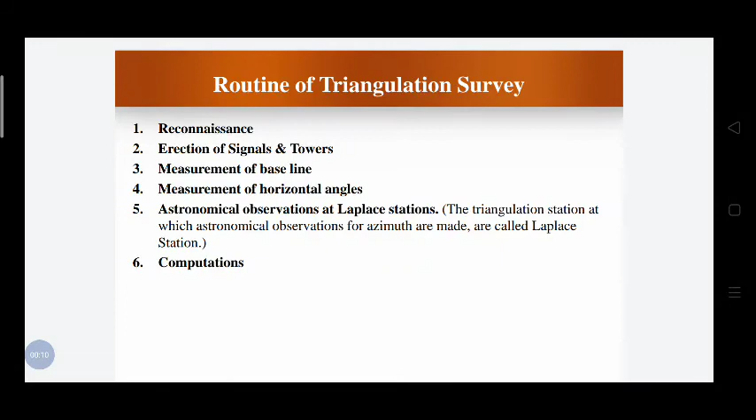Okay, the next topic is the routine of triangulation survey. These are the points: reconnaissance survey, erection of signals and towers, measurement of baseline, measurement of horizontal angle, astronomical observations and calculations. Okay, coming to the first one, reconnaissance survey.

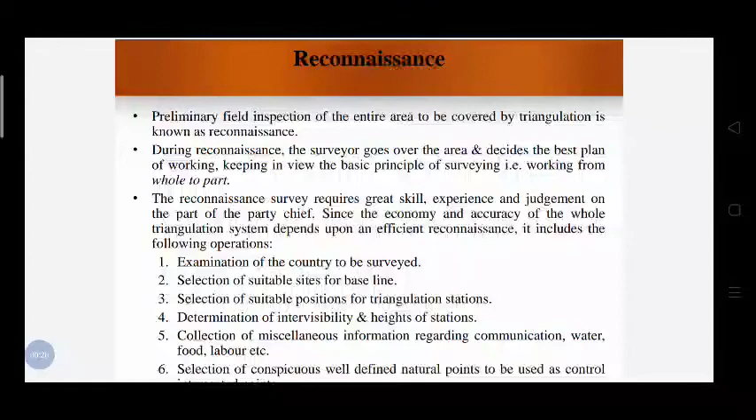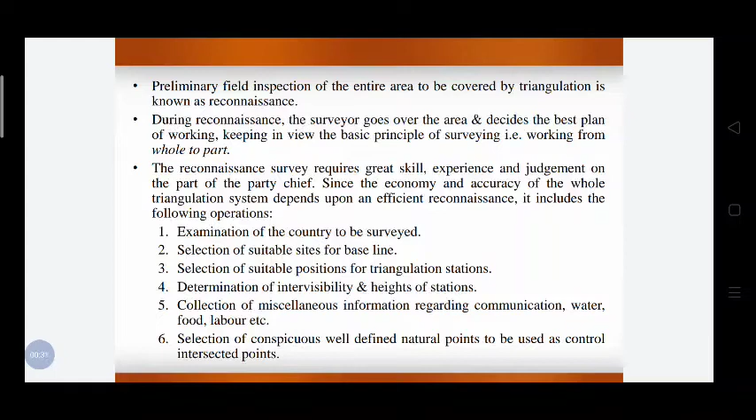What is a reconnaissance survey? It is a very rough survey carried out before carrying out the actual detailed survey. In the reconnaissance survey, the surveyor actually goes on the field and decides the best working plan, that is the approximate locations of the triangulation stations. Then he will work out on those approximate stations, and he will decide the actual or the correct

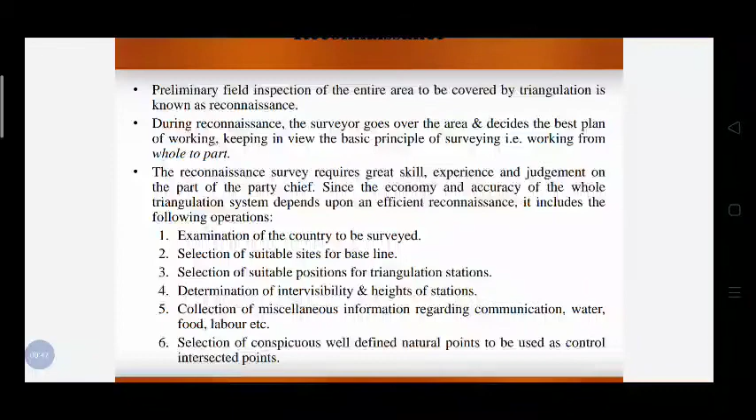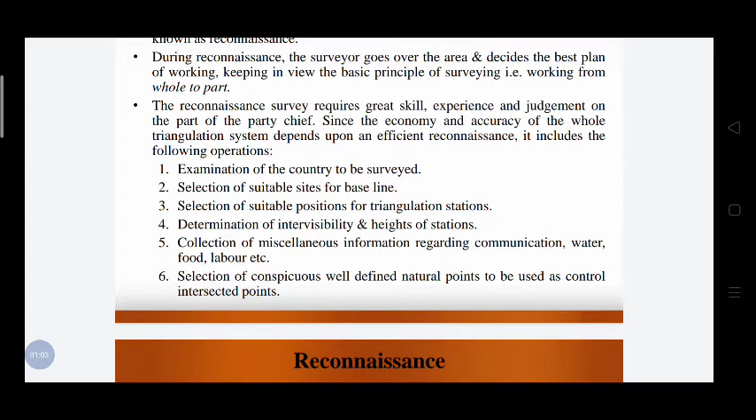triangulation station. For the reconnaissance survey, the surveyor should possess great skill, experience and judgment, as the economy and accuracy of the triangulation stations depend on his judgment, skills or his expertise

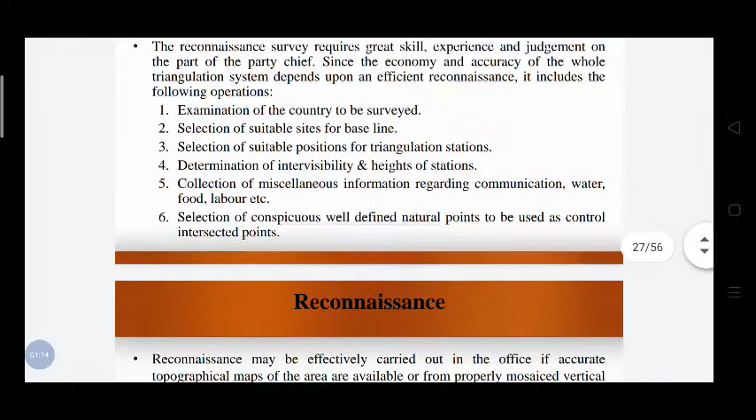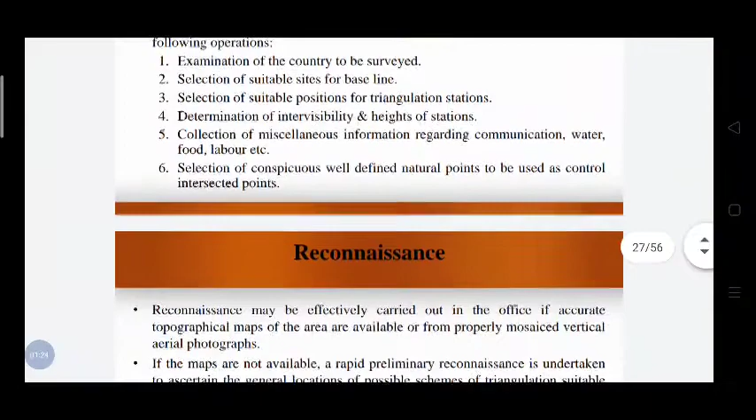in the field. So the reconnaissance survey includes the following operations: examination of country, that is actually going on the field to be surveyed, selection of suitable sites for the baseline, selection of suitable position of the triangulation station, determination of intervisibility and height of stations, collection of miscellaneous information regarding communication, water, food, labor.

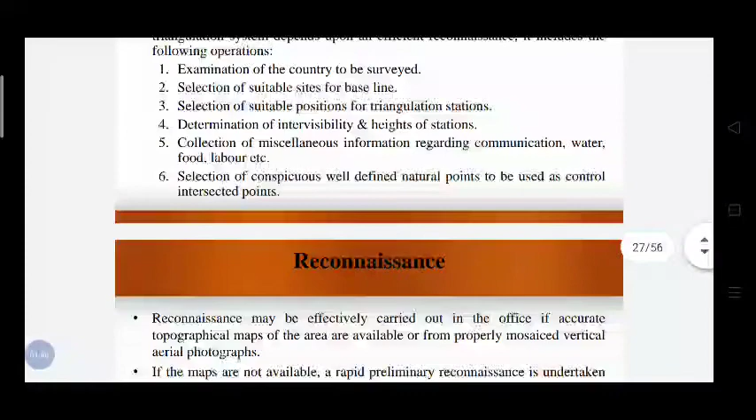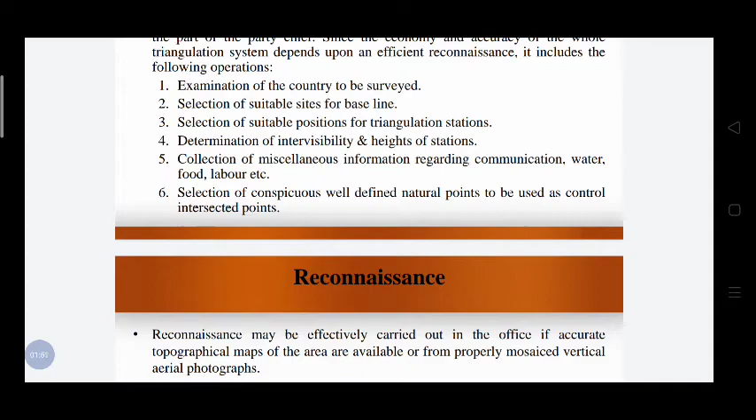As we have seen, the area of the primary, secondary or tertiary triangles goes up to hundreds of square kilometers. So when we travel in such a vast area, we should also make sure that there is proper communication between our base camp and the surveyors who are going on the field, and also the supply of food and labor.

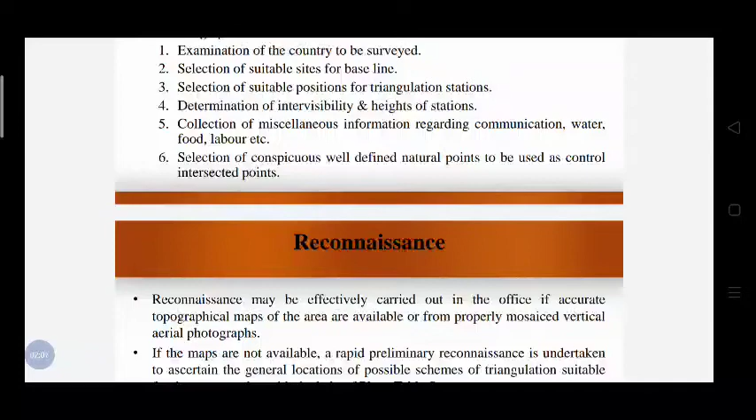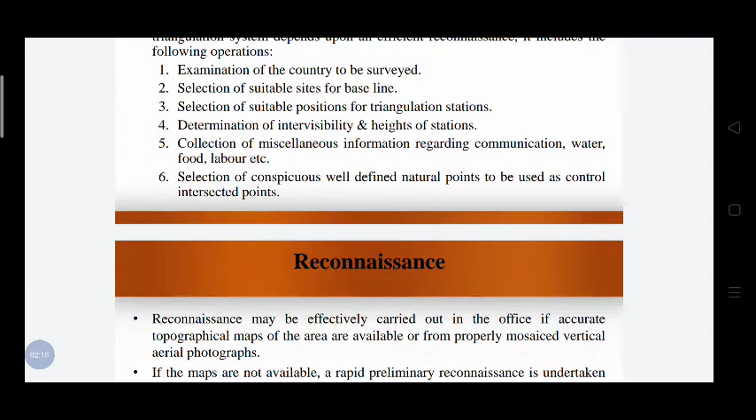Selection of proper well-defined natural points to be used as control points. So we should make proper use of natural elevation so that we can make sure of the intervisibility between the stations. If one of the points is located on high ground, it will be visible from the other stations.

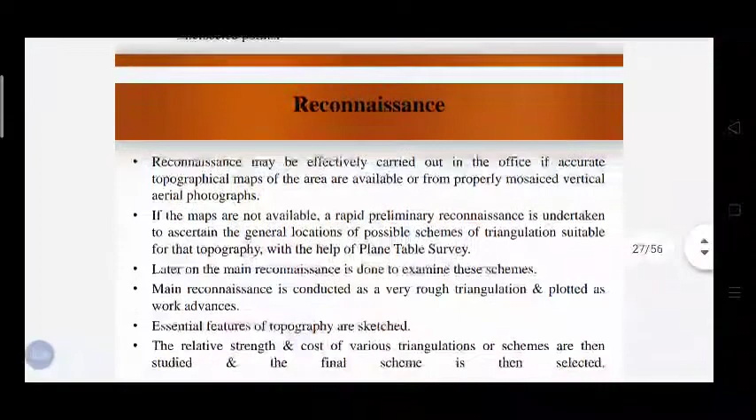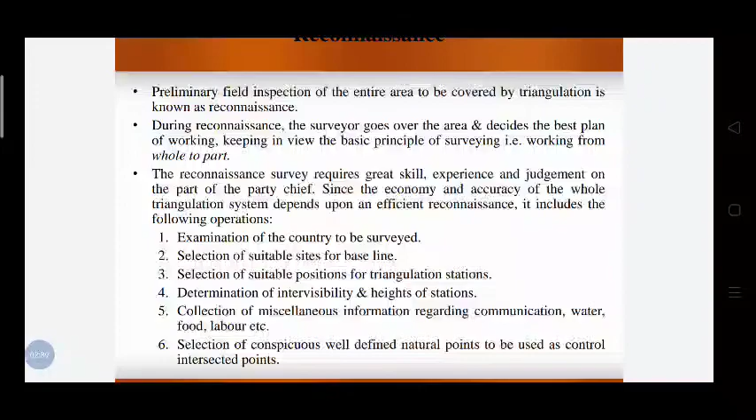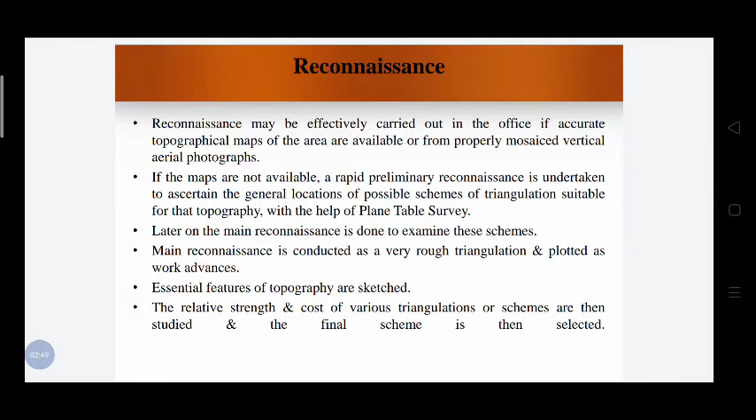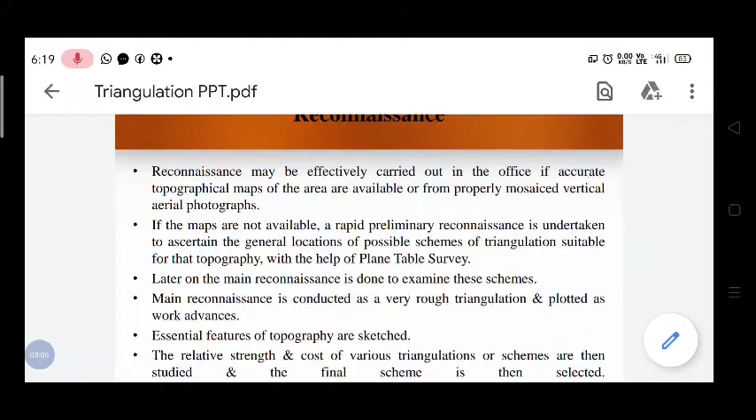Okay, in this slide we have seen what works we carry out in the field. Suppose we have a map of the area which is to be surveyed, where the triangulation stations are to be fixed. By observing and analyzing those maps, we can decide the positions of the triangulation stations. Also, if we have a photogrammetric map: what is a photogrammetric map? It is a map prepared by compiling, that is joining, photographs. The photographs are taken from a camera mounted on an aircraft which flies over the area.

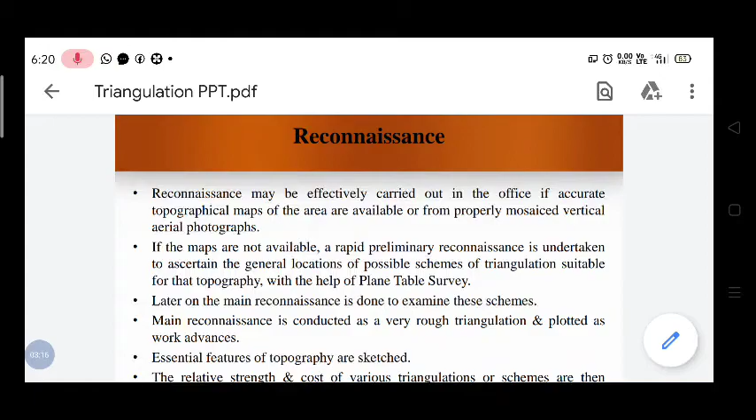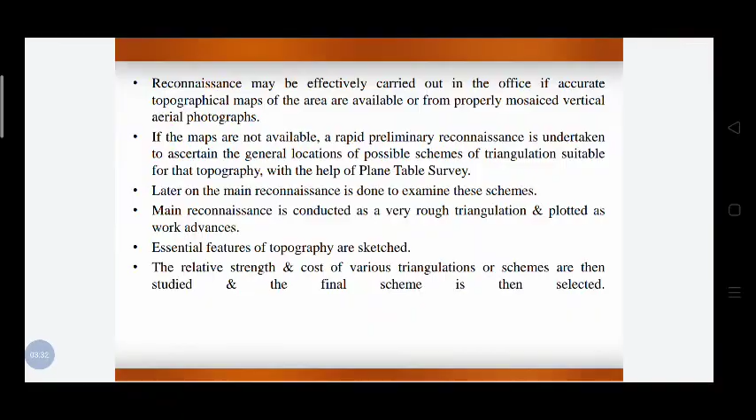Also, if the maps are not available, we can survey the area by plane table survey and determine the probable triangulation stations.

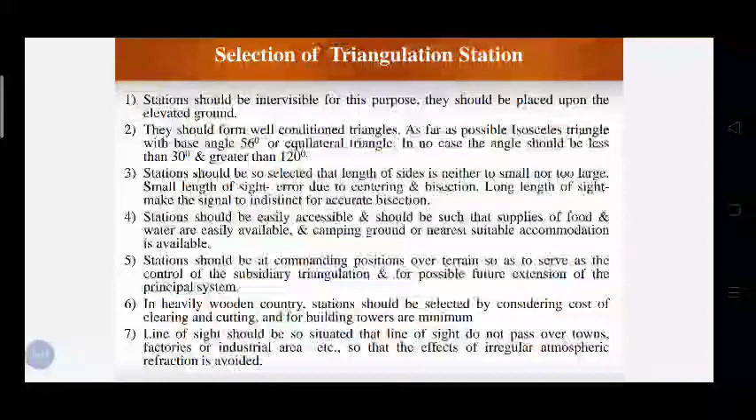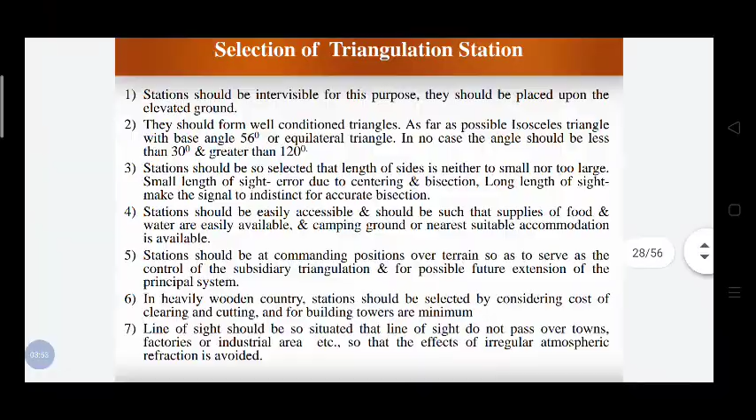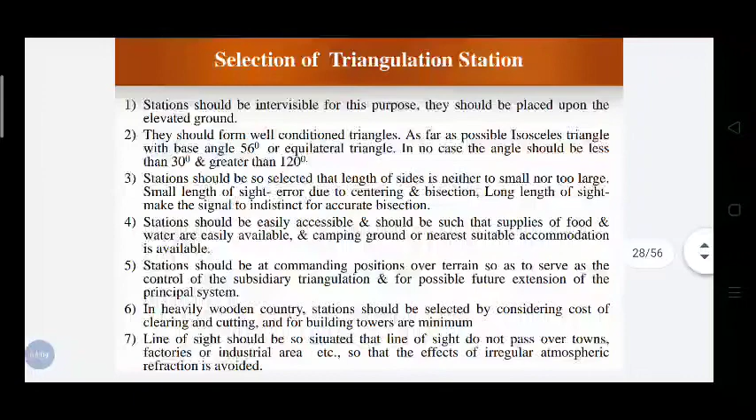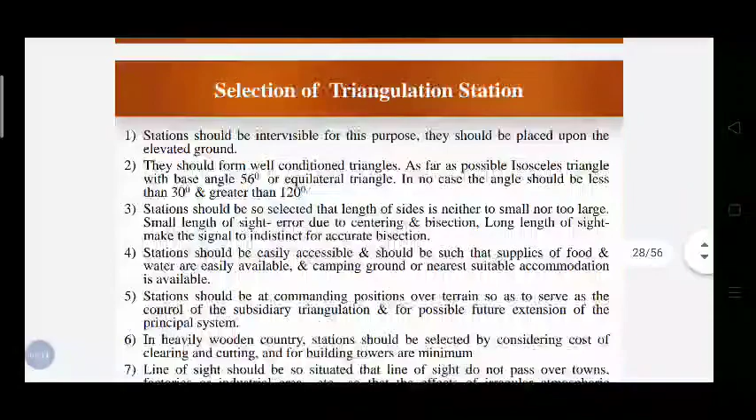Next, selection of triangulation stations. These are the points to be considered. All the triangulation stations should be intervisible. For this purpose, they should be placed upon elevated ground. Preferably the triangle should be an equilateral triangle, if not an isosceles triangle, or if not, a well conditioned triangle. In a well conditioned triangle, the angles should be greater than 30 degrees and less than 120 degrees.

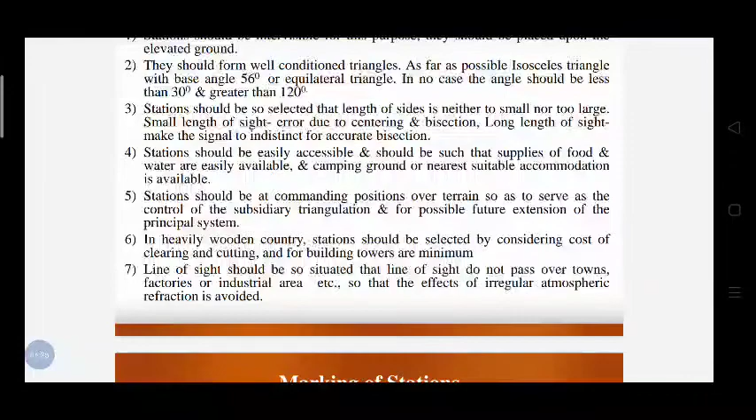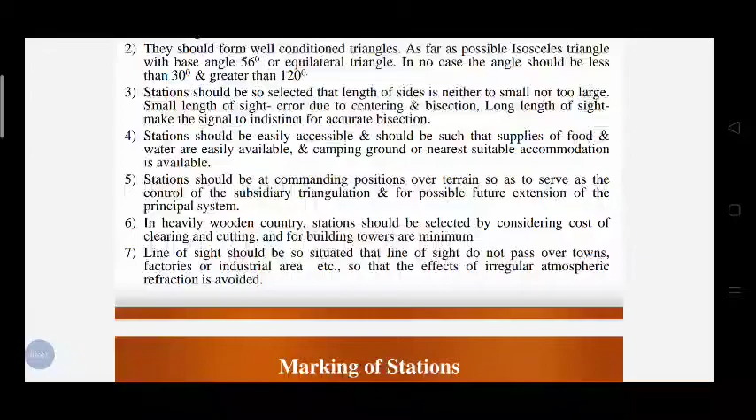The length between the stations should not be too short or too long. The station should be easily accessible, so that we can erect the signals and towers over the station, and so that food and communication can be carried to those stations. Again, the station should be in a commanding position over the terrain, so that it is intervisible.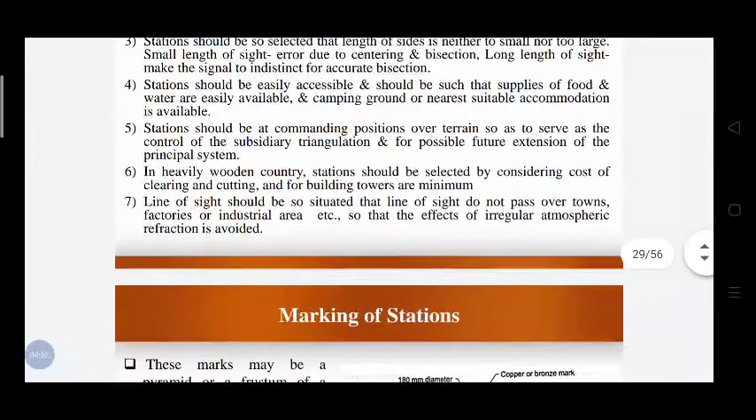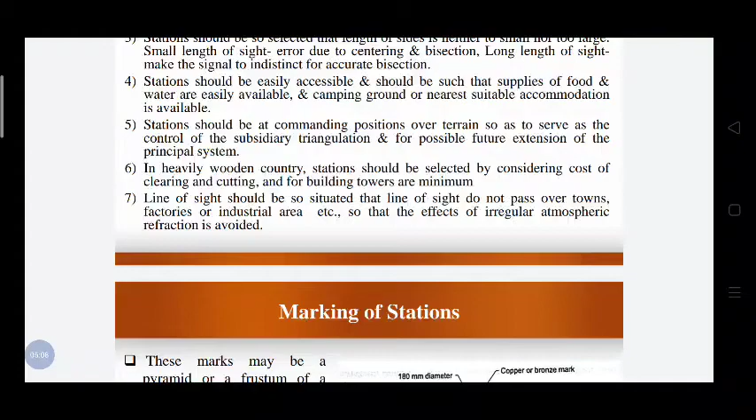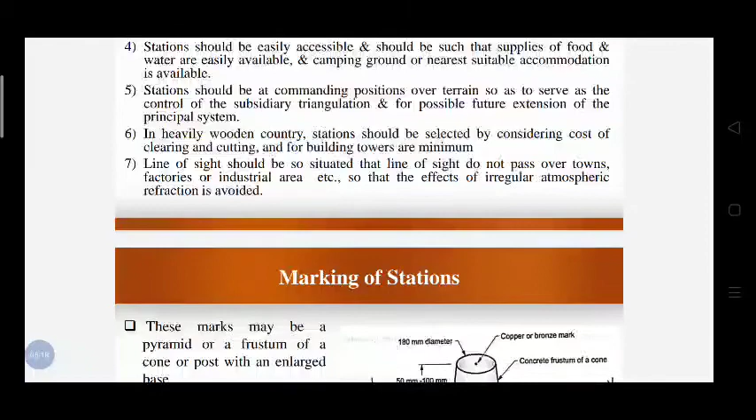If the station is located in dense vegetation, that is a forest area, the cost of cutting the trees and building the tower so that it is intervisible should be minimum. And the line of sight should not pass over towns, factories or industrial areas, because due to the pollution and the atmospheric haze there will be refraction of the line of sight, and we may not be able to sight the station.

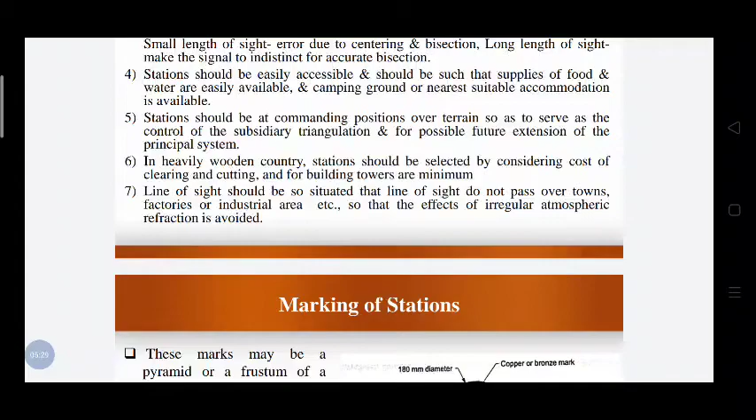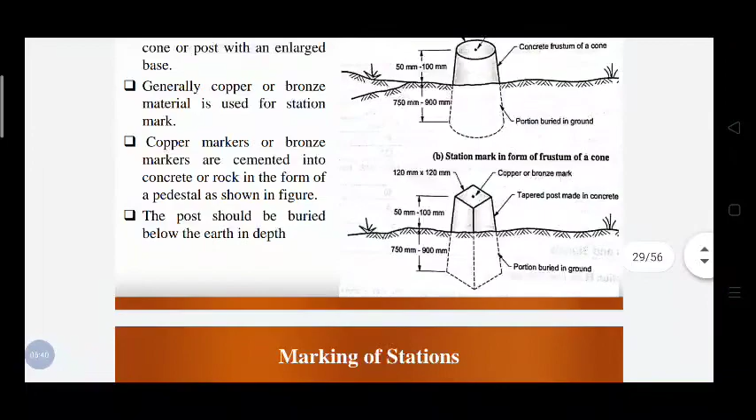The intervisibility will be a problem in that case. Okay, so once we locate the triangulation station, those stations are marked by these posts or poles. Okay, this is general, which for your information you can go through. It is never asked in the examination.

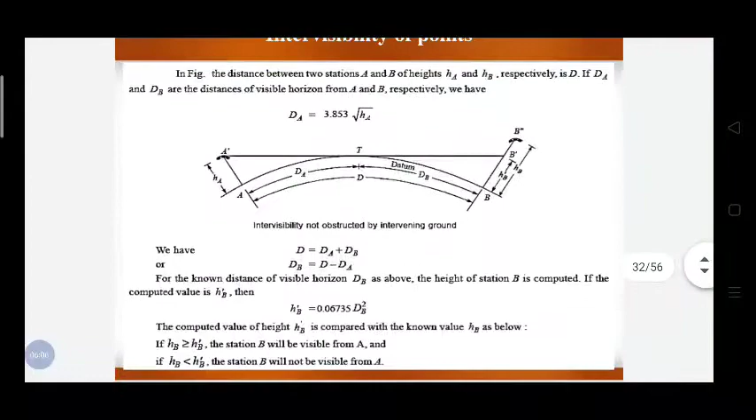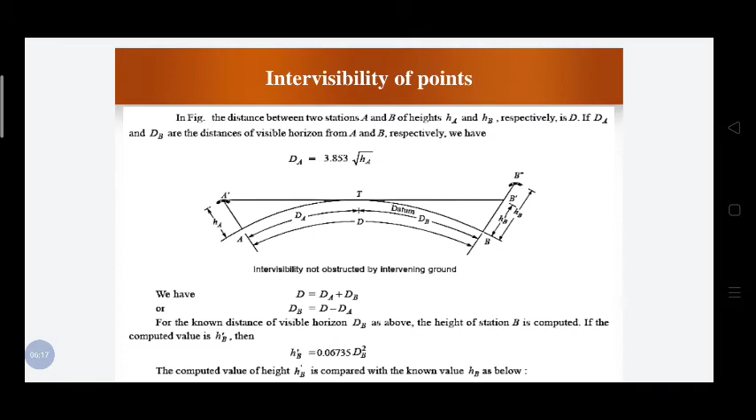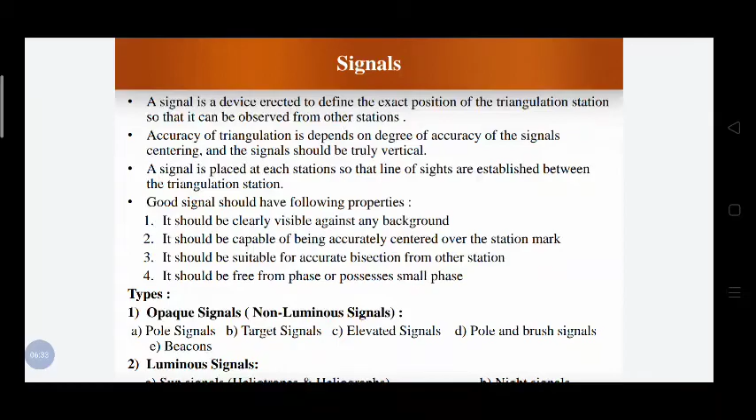Okay, now the signals. These signals and towers are erected over the triangulation station. A signal is a device erected to define the exact position of the triangulation station so that it can be observed from other stations. And the accuracy of triangulation depends on the degree of accuracy of the signals. Also the centering, and the signal should be truly vertical.

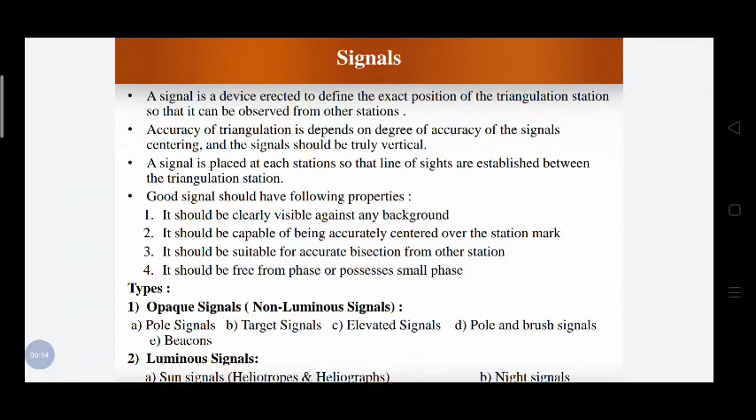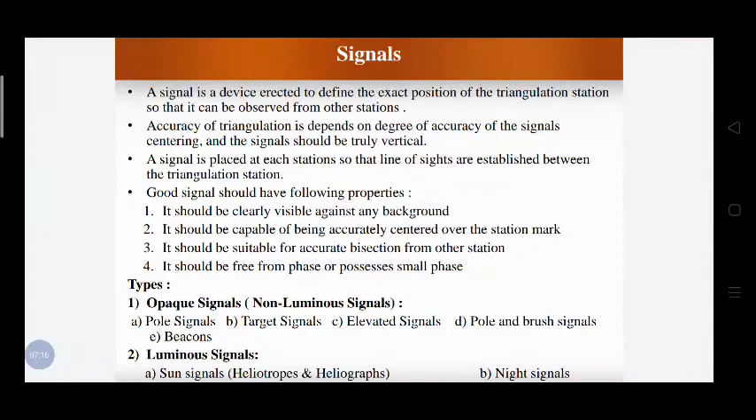So for the signal erected over the station, the accuracy depends upon the centering of the signal over the station, and also the verticality of the signal over the station. A signal is placed at each of the stations so that lines of sight are established between the triangulation stations. We can observe the signals located over all the triangulation stations from any of the other triangulation stations.

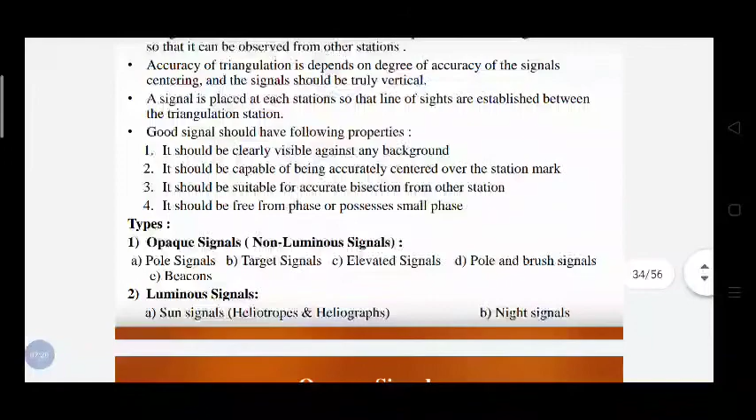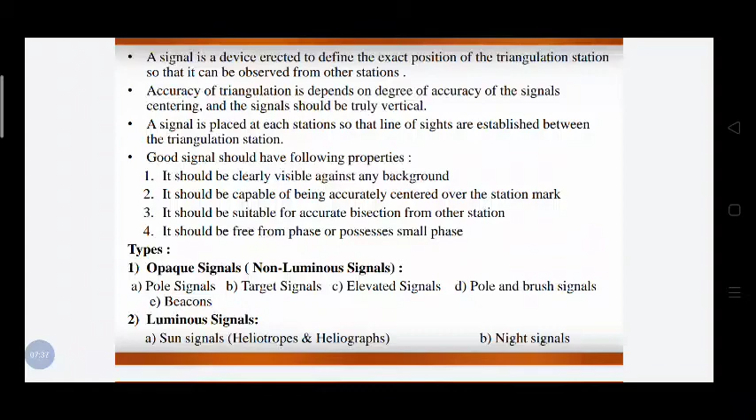These are the properties of a good signal. It should be clearly visible against any background, should be capable of being accurately centered over the station, it should be suitable for accurate bisection from the other station, and it should be free from phase or possess small phase. So what is the phase, we'll see in the latter part again.

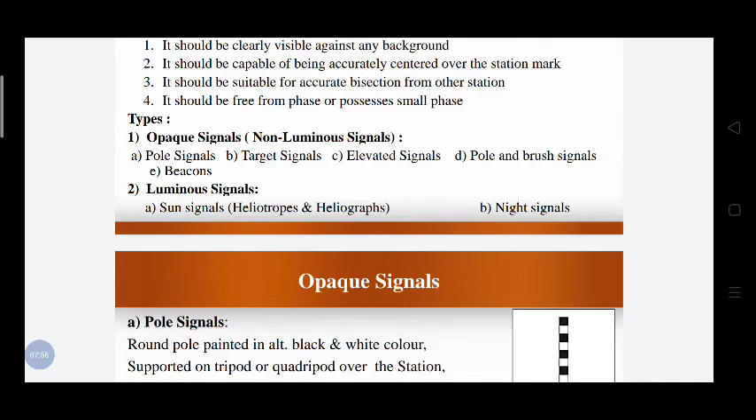Okay, now types of signal: opaque signal, that is non-luminous signal, and second, luminous signal. In the non-luminous signal, light rays are not used, and in the luminous signal, light rays are used. It can be natural light or artificial light. We'll see the opaque signal, that is the non-luminous signal. These are the various types: pole signal, target signal.

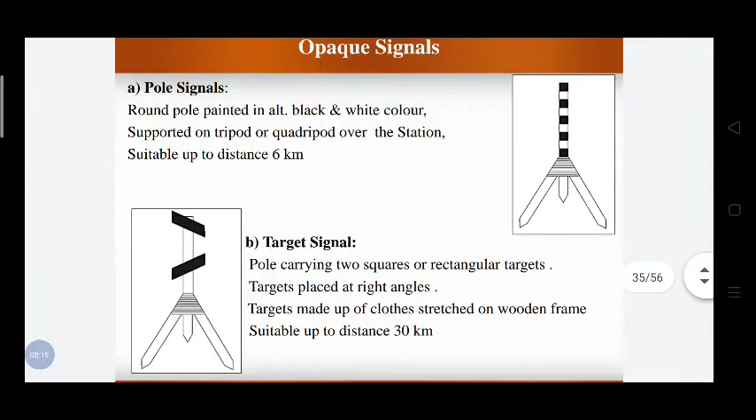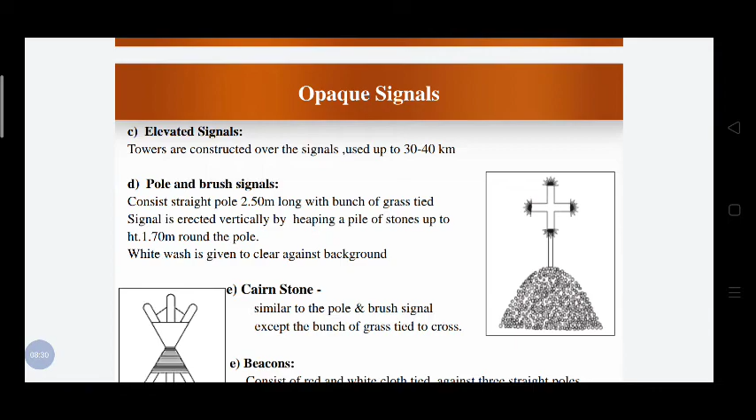These are normally painted poles, or targets are fixed over the poles for better visibility, and these poles are located over the tripod stand. You can go through this. These are very simple, but this topic, signals and towers, is very important as far as our theory examination is concerned. Many times the question is asked on this particular topic.

Okay, now coming to the luminous signal, in which light rays are used for geodetic work. It is a general practice to make observations on the luminous signal, with distinct and clear visibility even for a long distance, that is more than 30 kilometers. So we can sight signals at a distance of 30 kilometers from the observing station.

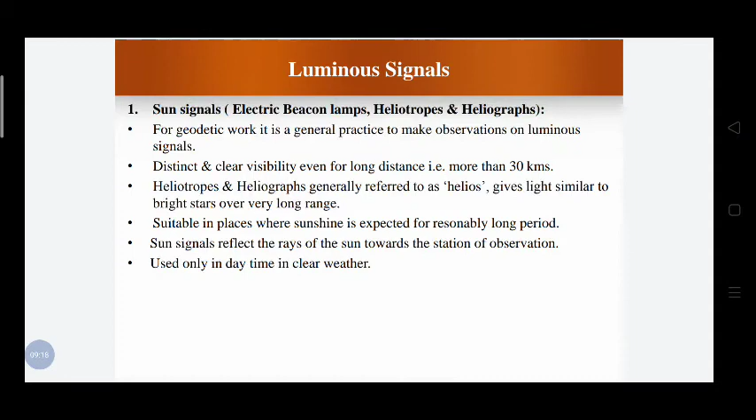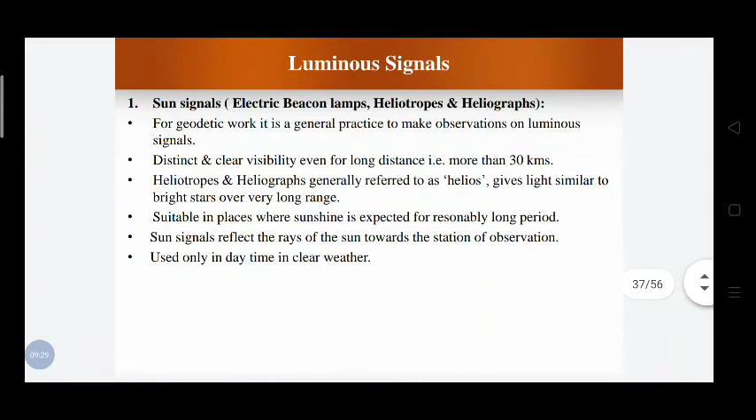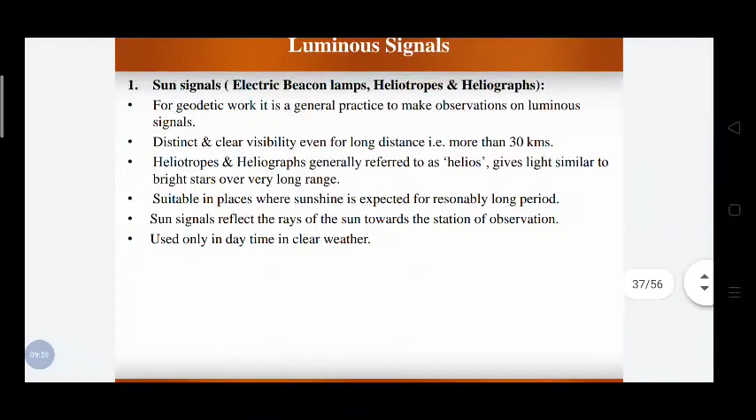Heliotropes and heliographs, generally referred to as helios, give light similar to a bright star over a long range. So these heliographs or heliotropes are used as luminous signals, suitable in places where sunshine is expected for a reasonably long period, since we will be using natural light, that is sunlight. A sun signal reflects the rays of the sun towards the station of observation, used only in daytime in clear weather. Okay, so what are the heliotropes?

Now this heliotrope consists of a circular plane mirror with a small hole at its center to reflect the sun rays, and a sight vane with an aperture carrying a crosshair. The circular mirror can be rotated horizontally and vertically through 360 degrees.

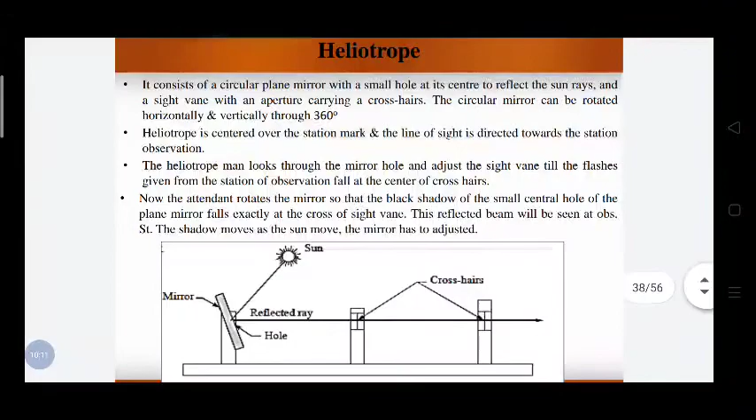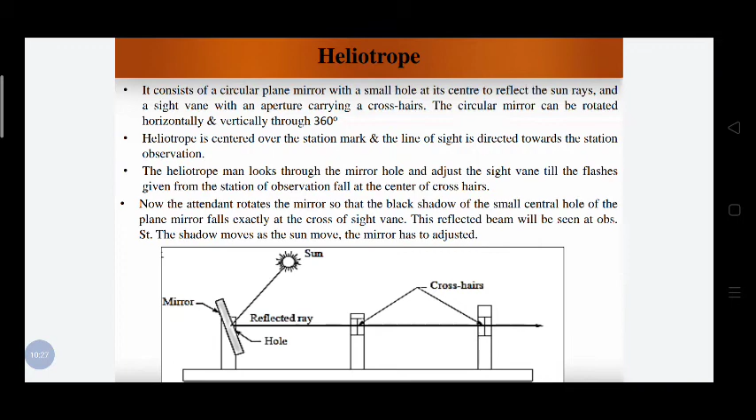You can see in the figure there is a plane circular mirror. This circular mirror consists of a hole at its center, and it can be rotated horizontally or vertically through 360 degrees. Also, in front of the mirror there are two sight vanes, on which we have fixed the crosshairs.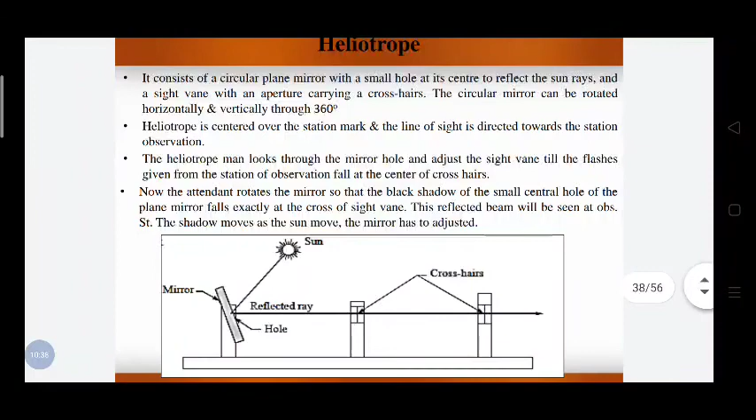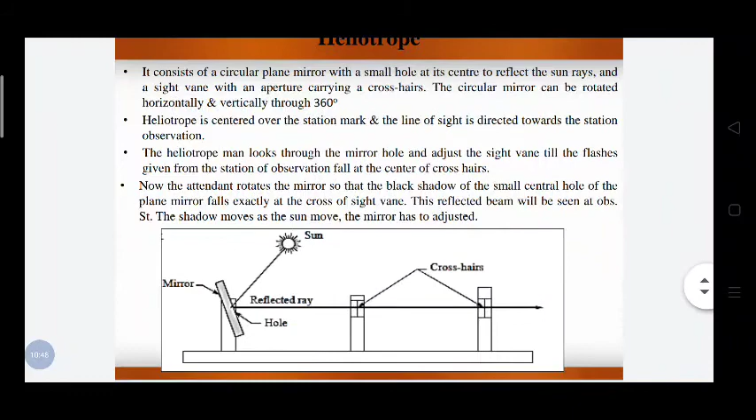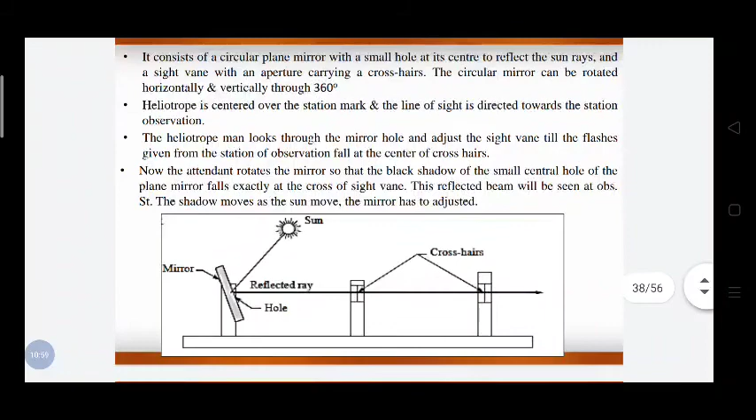Now the heliotrope is centered over the station. The assembly of mirrors is placed over the station, and the line of sight is directed towards the station of observation, that is, the other station which will be observing. The heliotrope man looks through the mirror hole and adjusts the sight vane till the flashes from the station of observation fall at the center of the crosshair.

The sunlight reflected through the mirror should pass through the junction of the crosshairs, the vertical and horizontal crosshairs of the sight vanes. So unless the light rays pass through the junction of the crosshairs, the sight vanes will be adjusted accordingly.

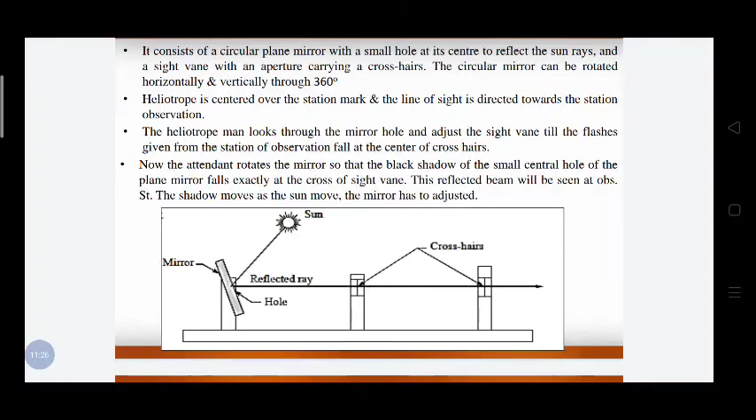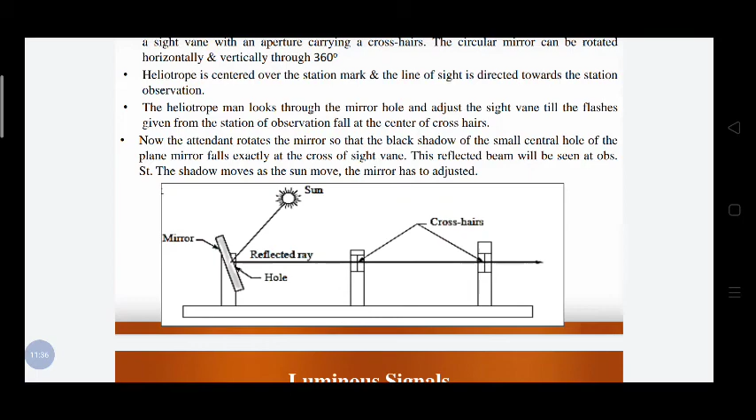Now the attendant rotates the mirror so that the black shadow of the small central hole, since the mirror has a hole at the center, falls exactly at the cross of the sight vanes. These reflected beams will be seen at the observation station.

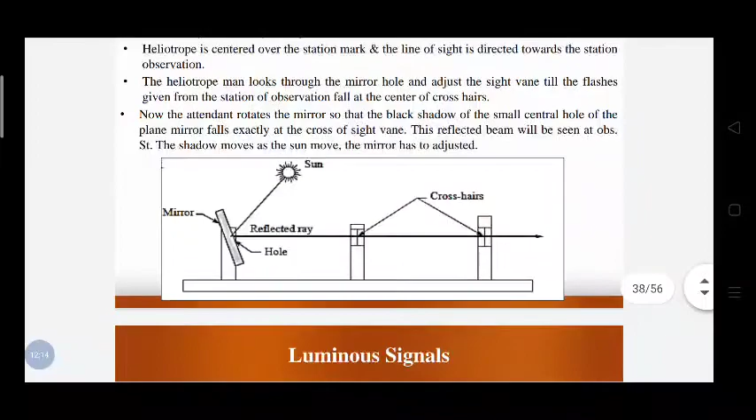And we have to keep on adjusting the mirror as the sun moves from east to west. Since the sun keeps moving, we have to keep adjusting the mirror so that the line of sight passes through the sight vanes and is reflected to the observation station at the other end. This was for natural light, that is sunlight, and for working at night we use artificial lights.

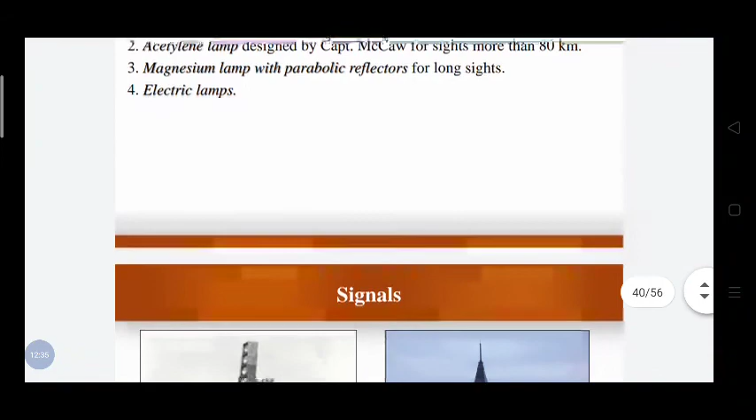These are some photographs of the signals. So, phase of the signal: as you have seen in the case of the heliotrope, it consists of a plane circular mirror. When light falls on the circular mirror, one half of the portion will be illuminated and the other half will remain in shadow.

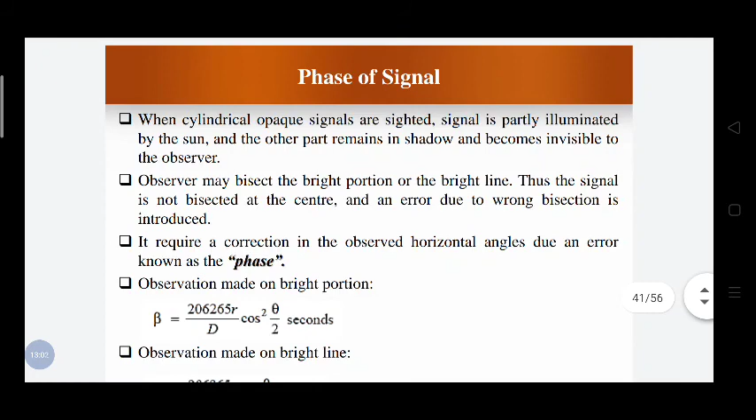So if you're at the opposite station for observation, you can see only the brightened portion of the mirror; you will not be able to see the part of the mirror which is in shadow. So you will be bisecting the center of the brightened portion and neglecting the shadow portion. So actually you are not bisecting the signal exactly at the center. This is nothing but the phase of the signal.

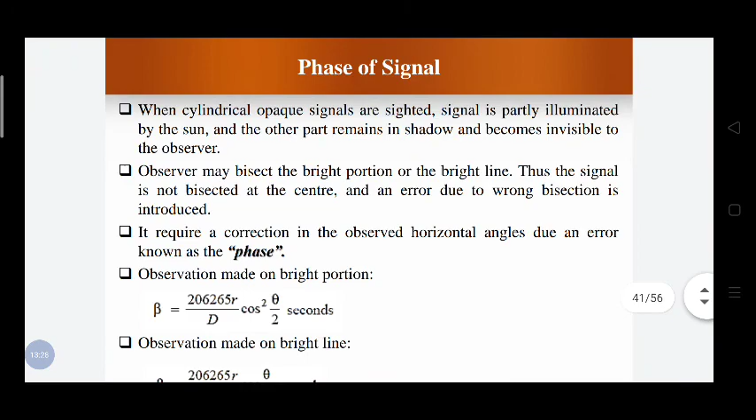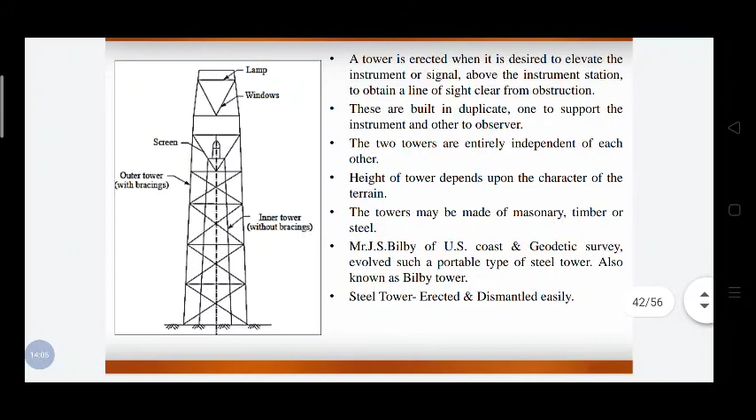Tower. Many times, due to some obstructions or ground elevations, you are not able to sight the station. So in that case, to raise the station so that it can be sighted from the other station, towers are erected. A tower is erected when it is desired to elevate the instrument or signal above the station, to obtain a line of sight clear of obstructions. So towers are erected only so that the stations are visible from the other stations.

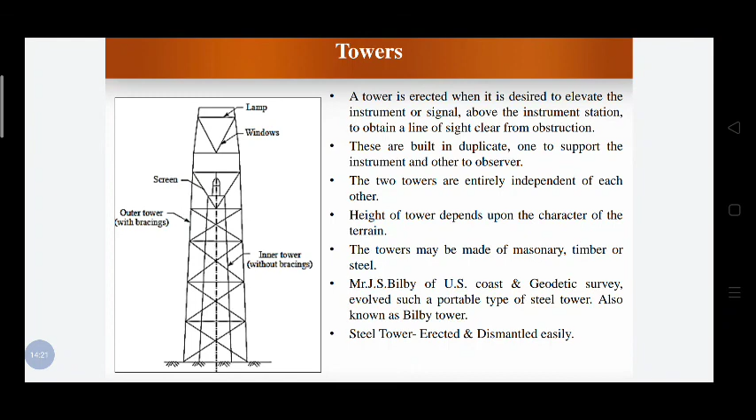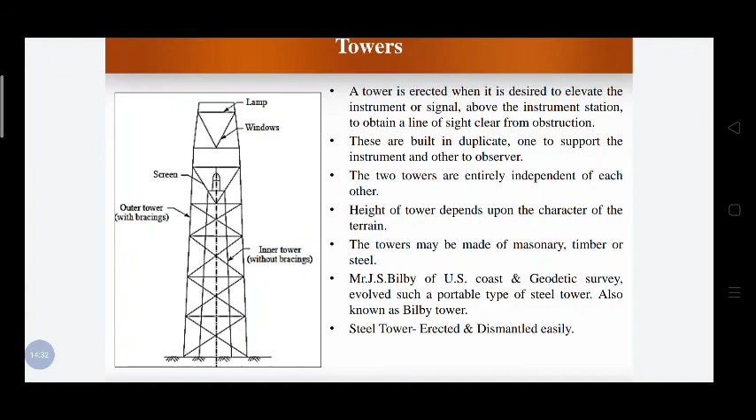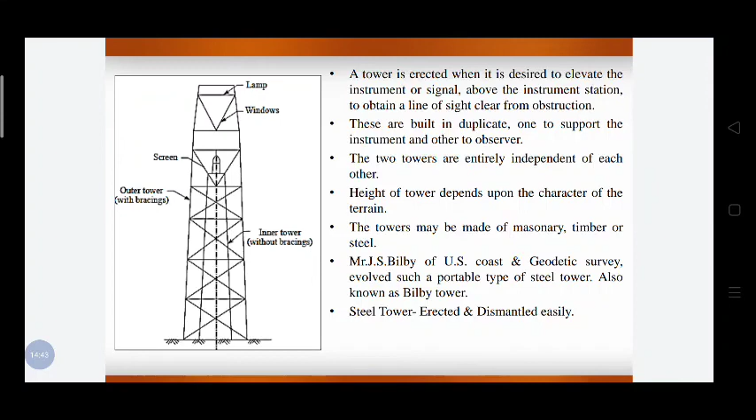Now these towers are built in duplicate. You can see from the figure there are two towers, one inside the other, one to support the instrument and the other to support the observer. The height of the tower depends upon intervisibility, which depends upon the terrain or obstructions. The tower can be built in masonry, timber or steel.